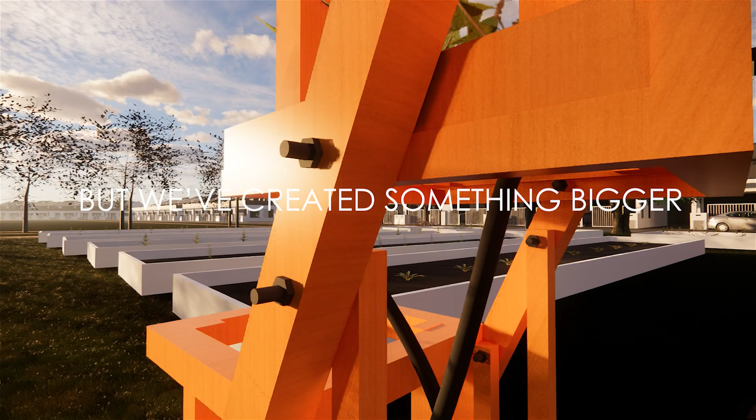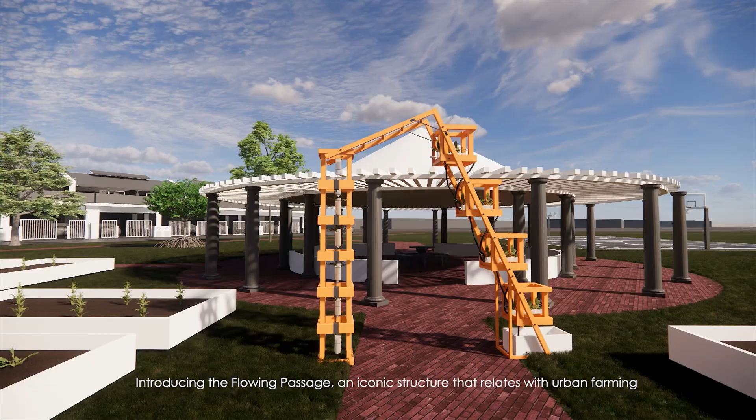Introducing the Flowing Passage, an iconic structure that relates to urban farming and creates serenity, which connects the community together. The structure consists of 10 cubes which are connected with a flow of water. The structure is constructed to be easily detachable and buildable.

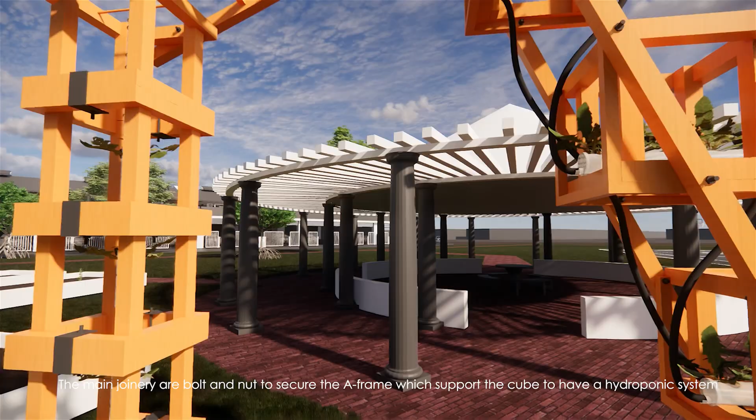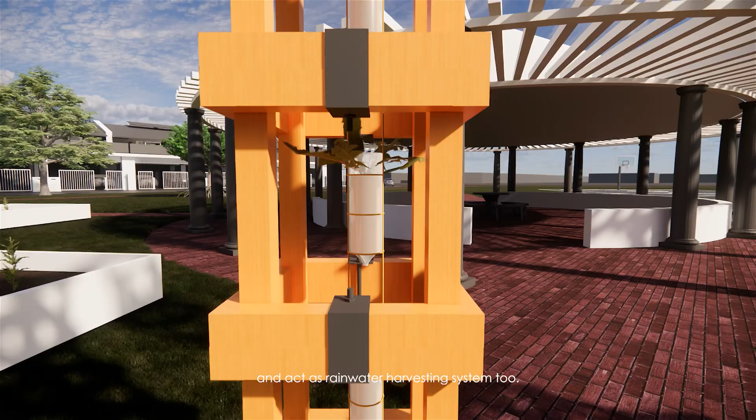The main joinery are bolts and nuts to secure the A-frame which supports the cube to have a hydroponic system. And the C bracket is used to secure each stacking of a cube where the vertical planting is placed. From the top, a slanted pipe is placed to channel the water flow from the vertical planting and acts as a rainwater harvesting system too. From a simple structure, it can be developed into something new.

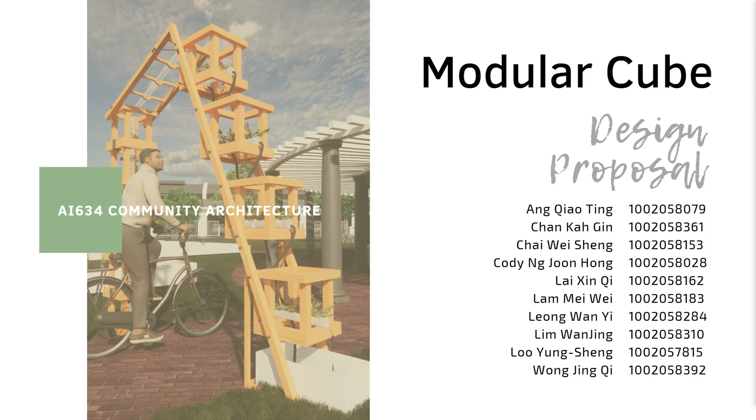Hello everyone, my name is John, a representative of Group 1 Modular Cube in AI 634 Community Architecture. Today I'll be presenting the design proposal of the modular cube we prepared. Let's dive right in. The community we chose is ThinkCity.

The site we chose is Urban Community USJ 12 in Subang Jaya. It is a densely populated residential garden which provides an oasis for other residents to initiate their own urban community. It is a place of connection and bond to meet new friends and to learn gardening in a community.

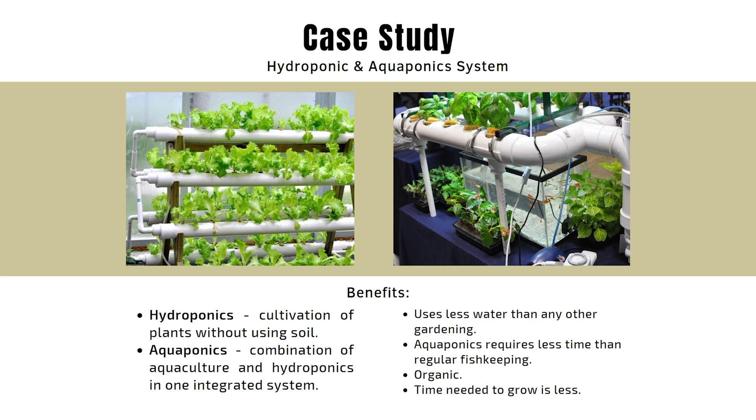Hydroponics is the cultivation of plants without soil. An aquaponics system is a combination of aquaculture and hydroponics in one integrated system. It benefits the user by using less water, thus it requires less time in the process. We chose the NFT hydroponic system for our design. This method draws water from the fish tank through a narrow tube such as PVC to flow through the plants. It can be set either vertical or horizontal.

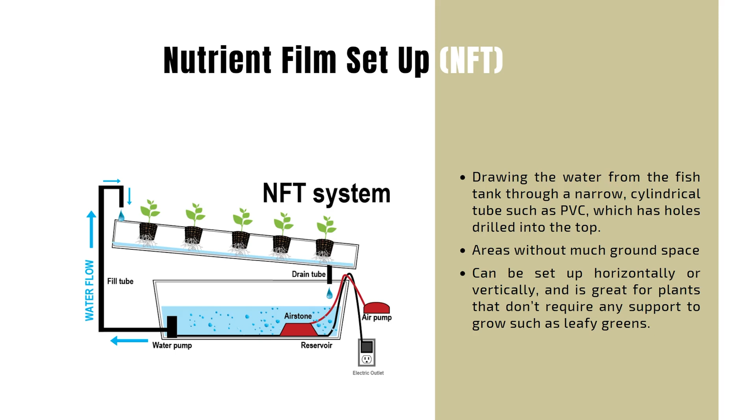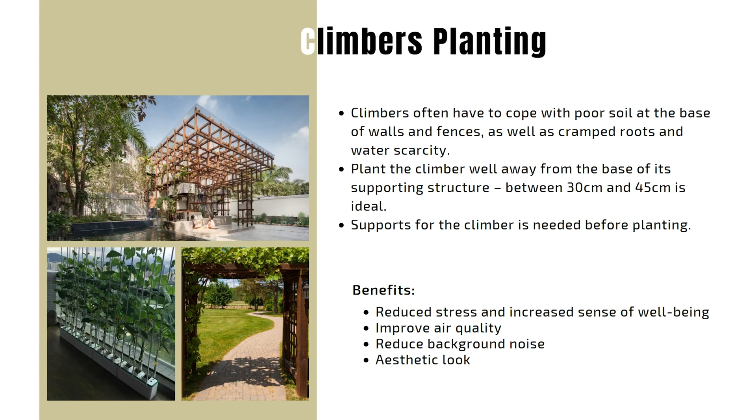Climbers planting can provide an aesthetic look for the structure, and it requires a minimum of 30 to 45 cm height to support the structure and growth. The benefits: it reduces stress and increases sense of well-being. It also improves air quality and reduces background noise. It is also visually and aesthetically pleasing.

Planter box is a cubic structure that is commonly used in plant vegetation. It prevents soil compaction and serves as a barrier to pests such as slugs and snails. It is usually fitted outdoors. The drainage system is the key importance of urban farming methods. The raised bed helps prevent root decay and plant diseases, which may cause death of crops.

Trellis is an architectural structure made from the framework of intersecting pieces of wood, bamboo or metal to support the climbers. It can be seen in many botanical gardens and acts as a facade system.

A-frame structure is a basic structure designed to bear load in a lightweight economical manner. It is formed by two similar-sized beams arranged at a 45 degree angle and attached at the top. When the load is put at the top of the frame, the load will separate and transfer it into the ground.

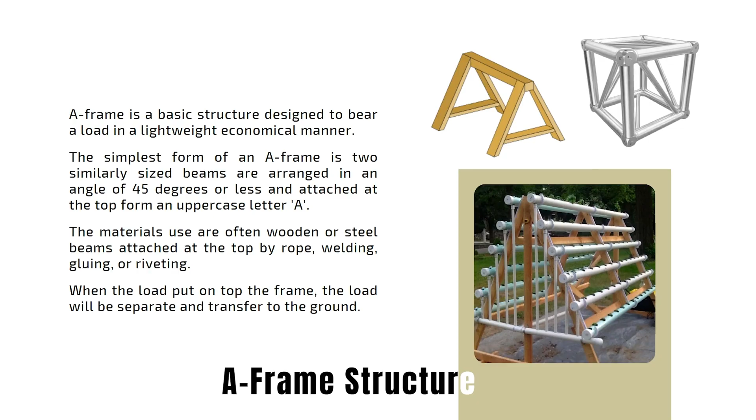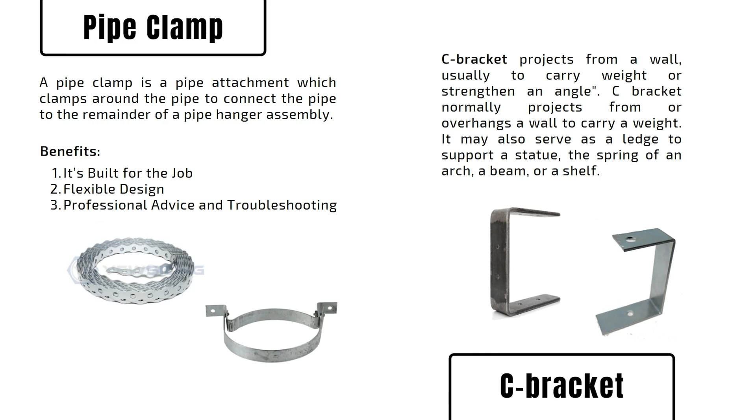Pipe clamp is a pipe attachment that clamps around the pipe to connect other pipes or other structures. It is flexible and malleable to fit the design function. While C-bracket is used to carry weight or to overhang a wall. It can also be a joinery with bolt and nut. Nut is a type of fastener used with bolts. Bolt is a solid cylindrical fastener used with nuts.

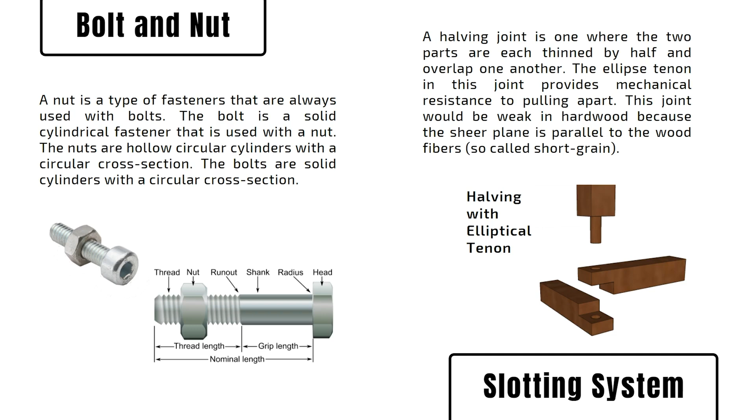Slotting system is achieved by elliptical tenon and halving joint, where the two parts are each thinned by half and overlap one another, generally made of two wood materials. The pipe holder is used to handle the PVC pipe with the hydroponic system. It will connect to the modular cube by tenon and mortise, thus it is environmentally friendly and non-toxic to the plants.

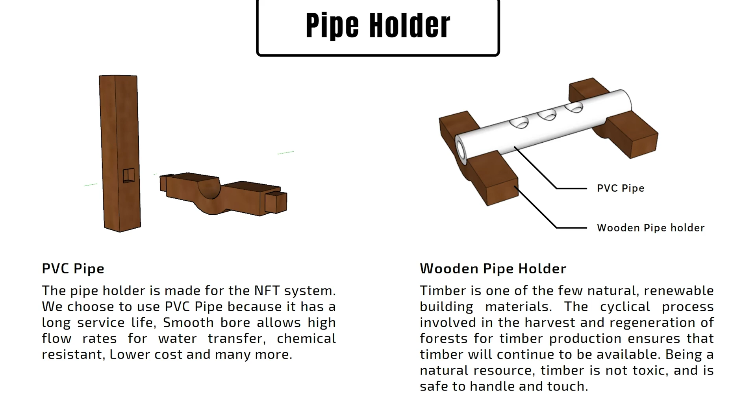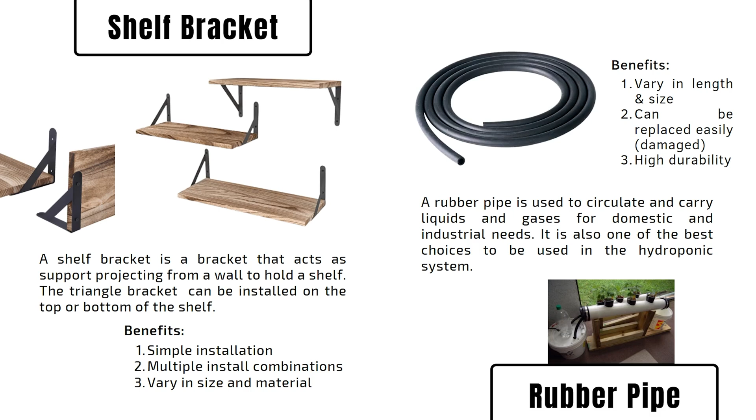Shelf bracket is a bracket with a frame structure that is attached to the wall. It is used to hang a platform on top of it, while a rubber pipe is used to circulate and carry liquids or gases. It is also one of the best choices to be used in a hydroponic system.

Finally, the modular cube design development. At the first step, we designed the cube attached to increase its stability. However, it reduces creativity and aesthetic features of the design. Then we developed it with a slotting system and some additional elements such as net and timber panel, but the urban farming approach was disturbed.

Next, we made improvements by adding structure to utilize the space for developing, and added an aquaponic system. As disappointing as it seemed, it now functions more as an aesthetic feature than practicality. Next step, we simplified the structure while maintaining the function, but the facade structure is too rigid or fixed, which lacked the purpose of a modular design.

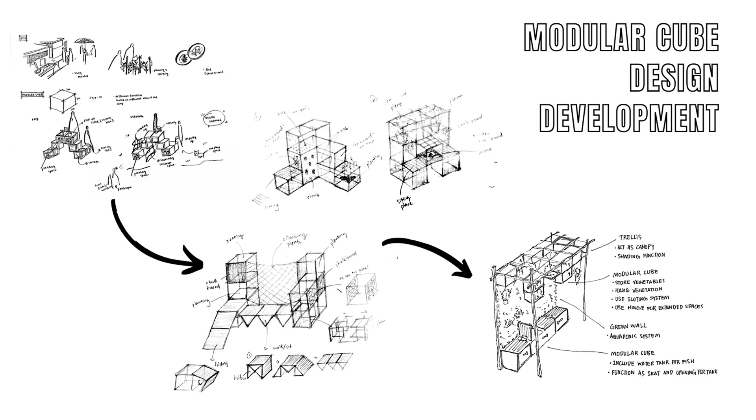Finally, we transposed the design into a more robust modular approach by attempting a different type of joinery. Here are some of the ways to arrange the modular. The joineries consist of an A-frame, C-bracket, bolt and nut and spreaders. Starting with the hydroponic system, each cube is placed on top of an A-frame, which has been set in place by bolt and nuts.

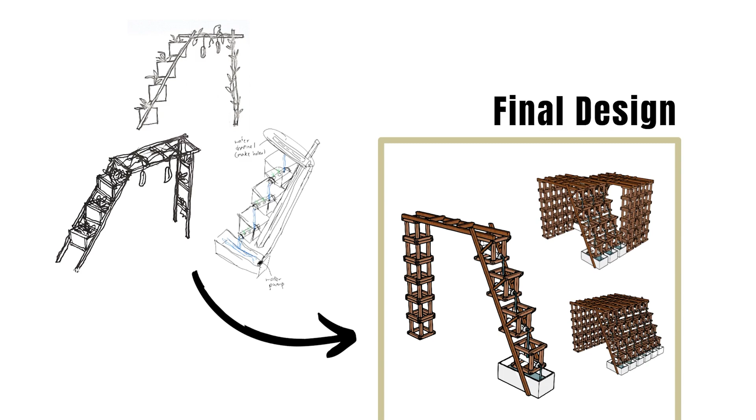Following on with the vertical structure, each cube is held together using a C-bracket. The function of this is to house the vertical planting system and rainwater collection system. At the top of the structure, a slanted pipe is placed to allow rainwater to be stored in the vertical planting system. Here are some of the perspective views as follows.

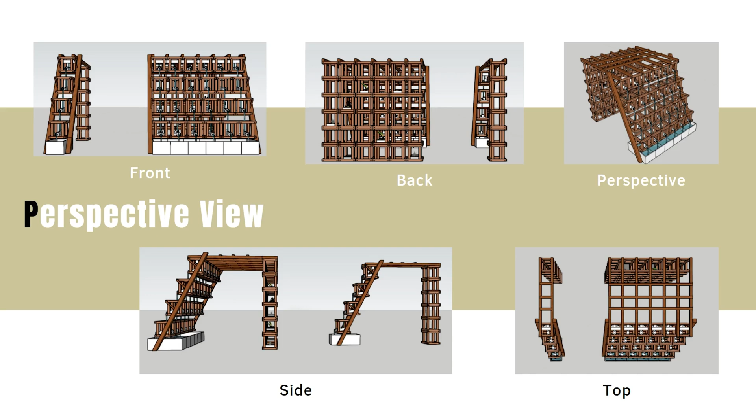The slanted angular rack of the design is constructed for hydroponic planting system purposes. The cube can be disassembled and changed in position through the frame shelf bracket. The elevated stack modular cube is a vertical garden system using recycled bottles that are hung by a string and uses a rainwater collection system to plant the crops. Lastly, the top part leads the climber plants to grow while it acts as a gutter.